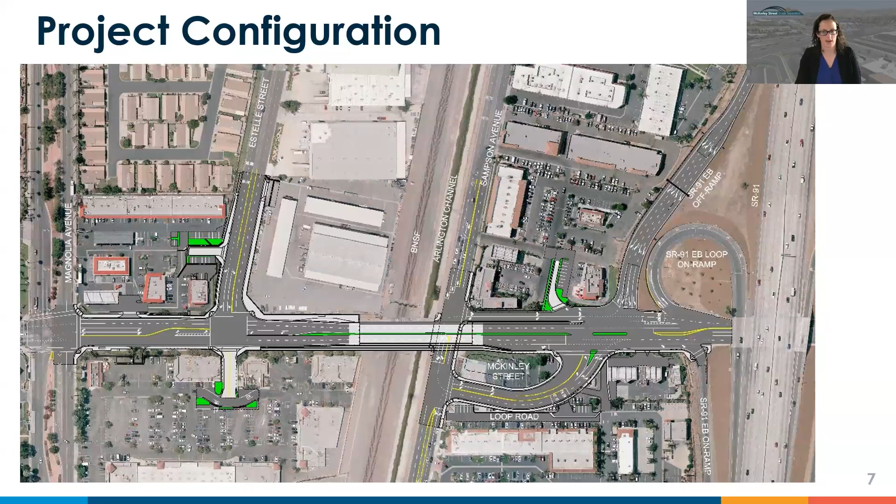All right, let's do a quick run through of the project improvements. Most of you have seen this slide before, so we'll keep it quick, but for those who haven't seen it, this is the project configuration in the after condition. McKinley Street will be a 4-lane facility, 2 lanes in each direction. Magnolia Avenue is on the left side of the slide and the 91 freeway is on the right side with Sampson down the middle. In this rendering, you can see the SR 91 to the upper right and Estelle Street to the lower left side. This is a view looking northwesterly toward the bridge.

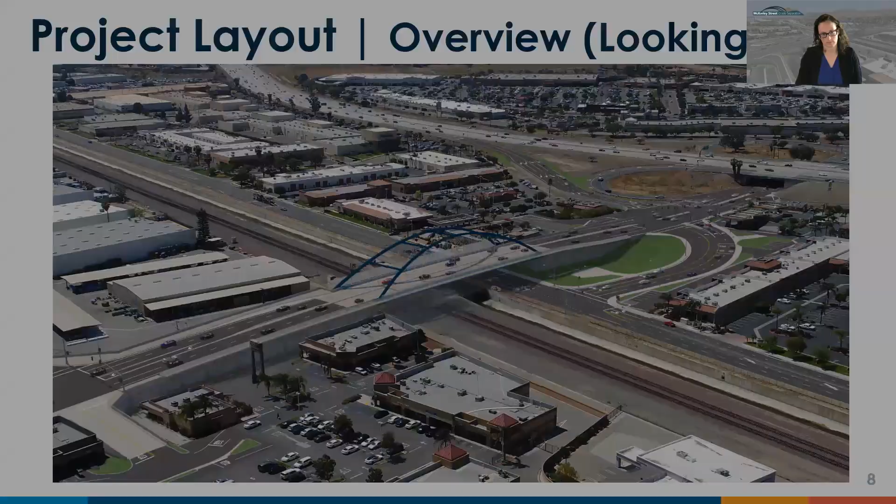In this rendering, you can see a good view of the steel network arch bridge looking westerly. It is a lightweight structure that can be built in a staging area and moved into place overnight, which we expect to occur early next year.

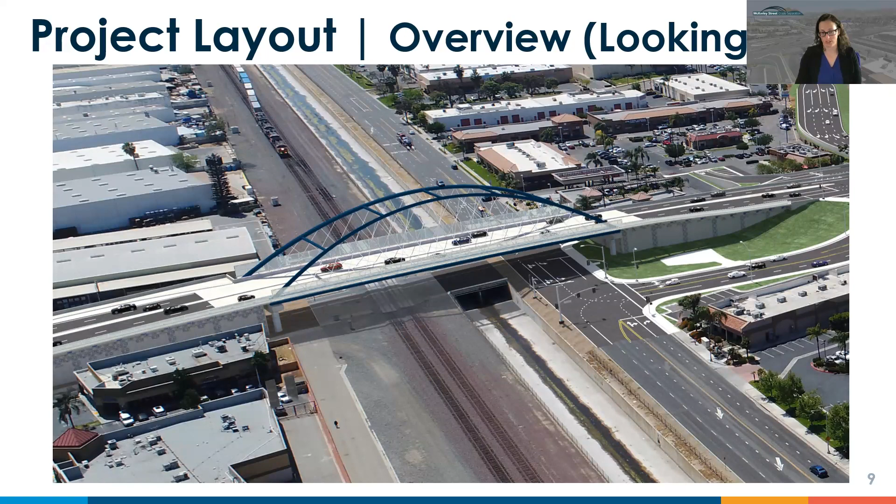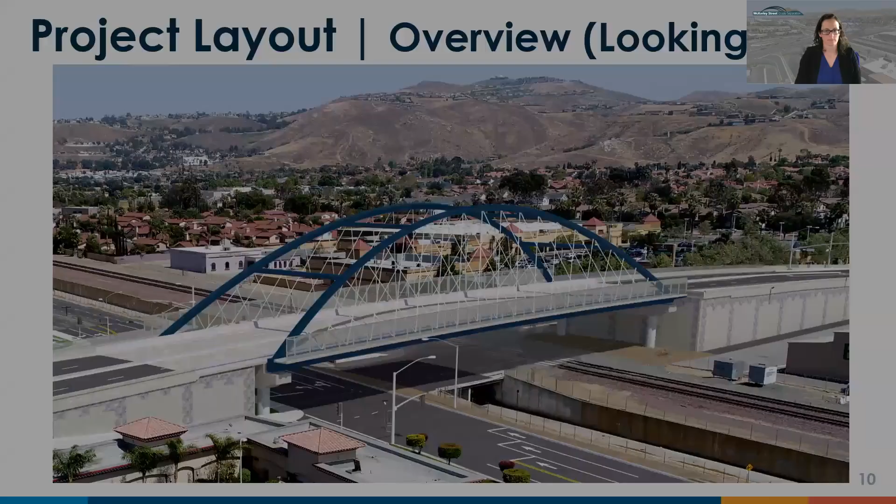This is a great view looking southwesterly where you can see some of the retaining walls, and as you can see, they will have the dot pattern as previously presented. Here's a good view looking northeasterly where you can see the McKinley Street southbound side ramp connecting to Sampson Avenue. This is a good view and close-up of the bridge looking southbound over the bridge.

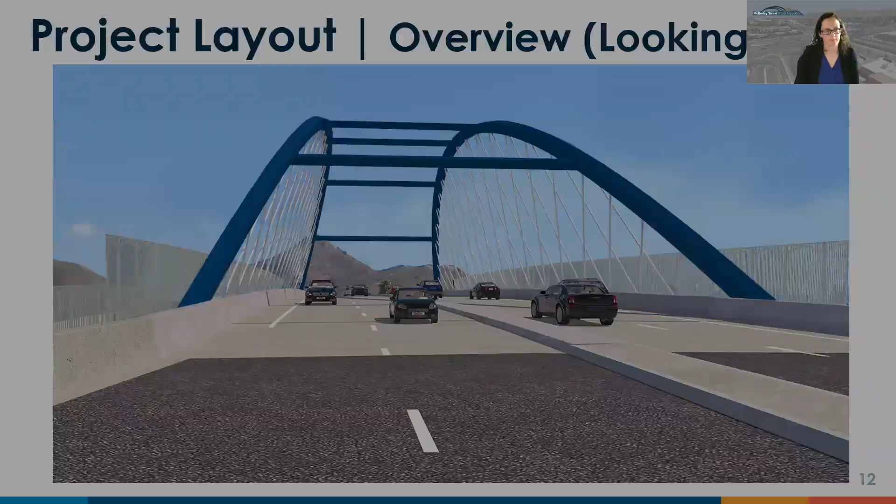Let's do a quick fly through from our drone footage shot earlier in May.

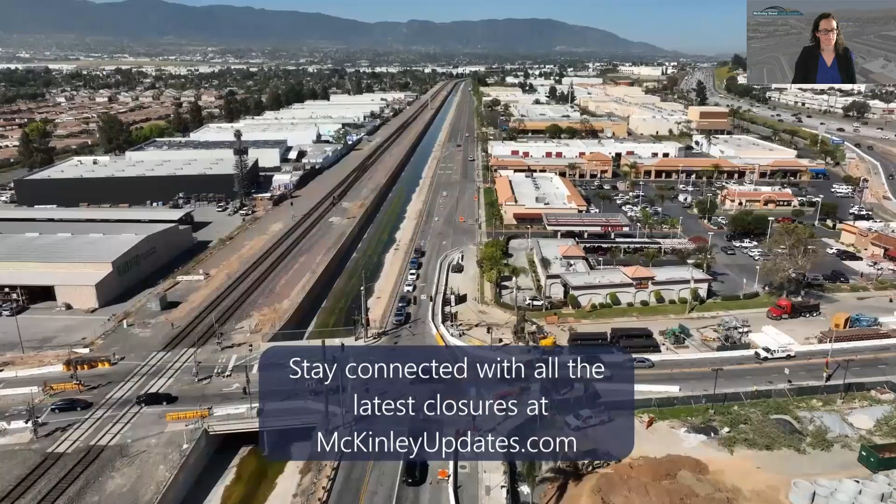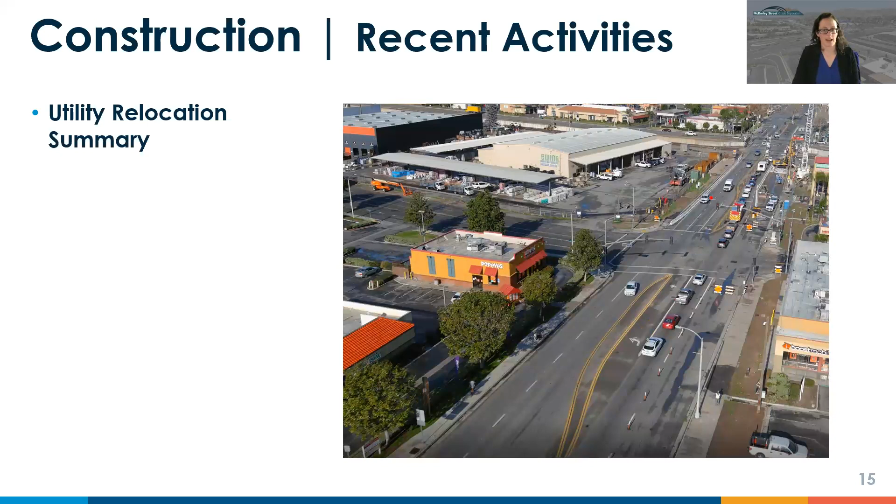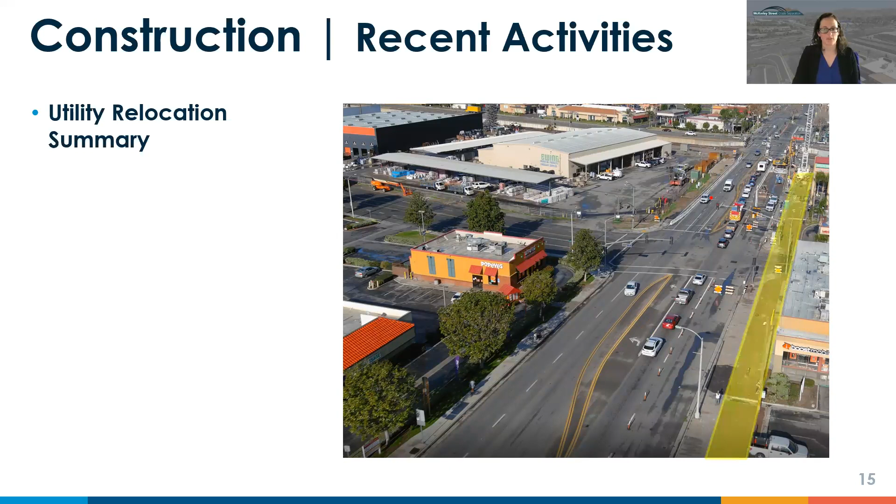One of the big achievements late last year was completing the third-party utility relocation efforts. Let's quickly go over what those look like. Here's an aerial looking northwest over the Estelle intersection from last summer. You can see the poles highlighted in yellow, and overhead electrical lines have been removed and undergrounded. We also have gas, electric, and public utilities that have completed their underground work, shown in yellow right here. And Riverside Public Utilities relocated the remaining water line improvements here noted in yellow.

So what do we have left? We have miscellaneous raise to grade adjustments to manholes and vault structures during construction. We also have sewer water line work associated with both the City of Corona and the Western municipal facilities. And lastly, we have some closeout for utility agreements. I'm going to turn this over to Josh Cosper with Mark Thomas to talk about some additional recent construction activities.

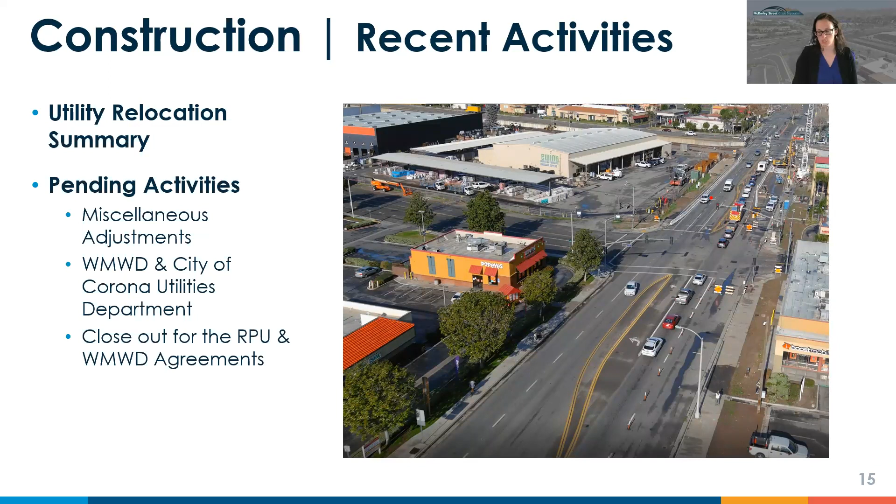Josh? Thanks, Juliana. So what have we built lately? Well, along the east side, we recently completed both piles late last year.

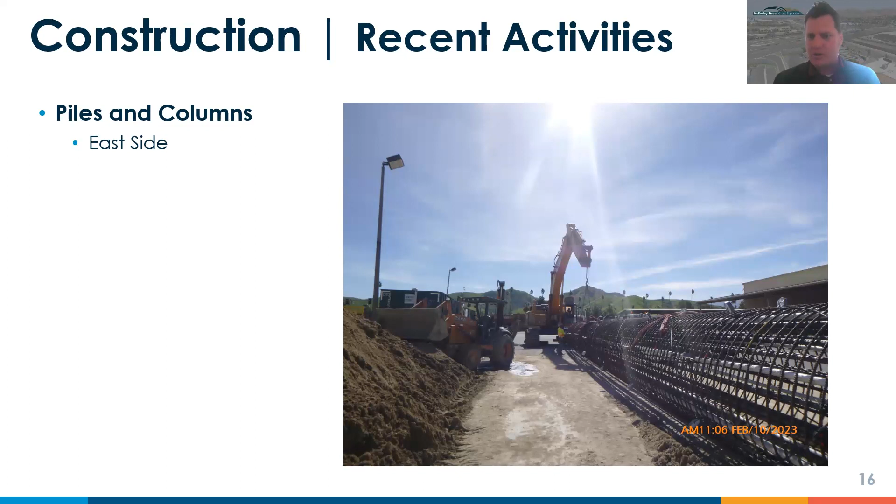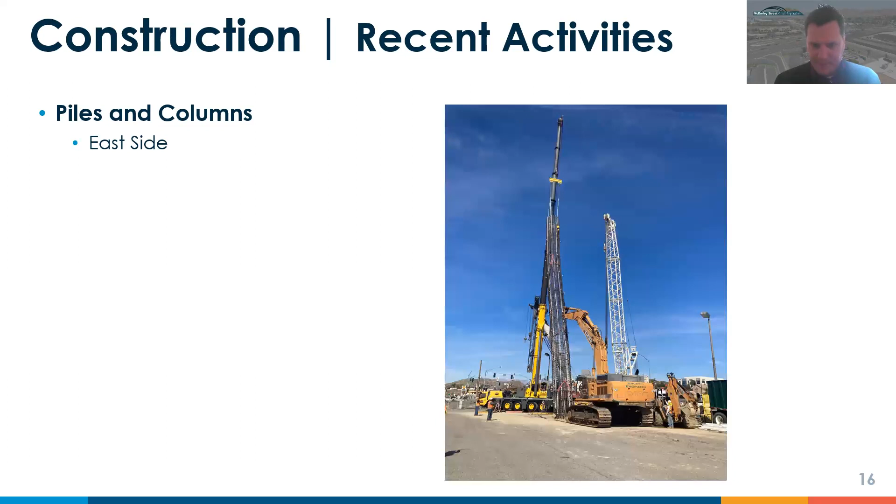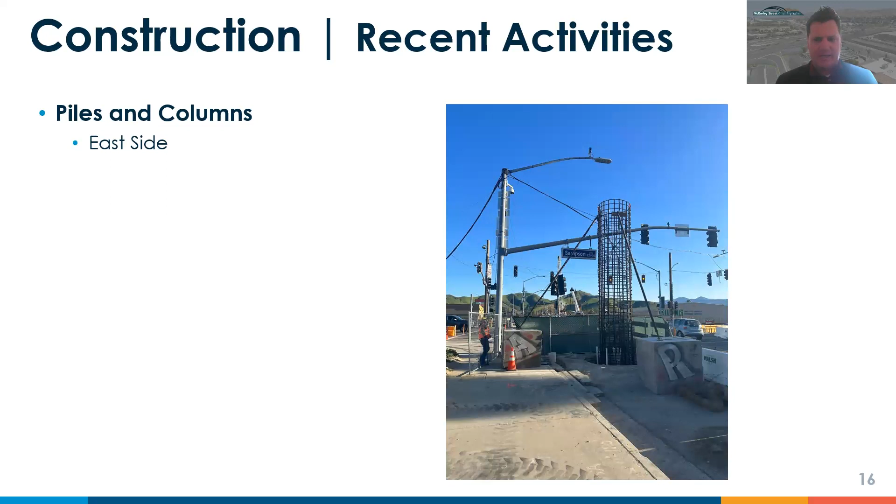The contractor recently completed some of the column erection for the rebar cage, which we'll go over as well. Here's a good picture of the rebar cage associated with each column, here's the crane actually lifting it up, another good picture, and here's one of it getting dropped into place. Lastly, here's what it looks like ready for the actual construction.

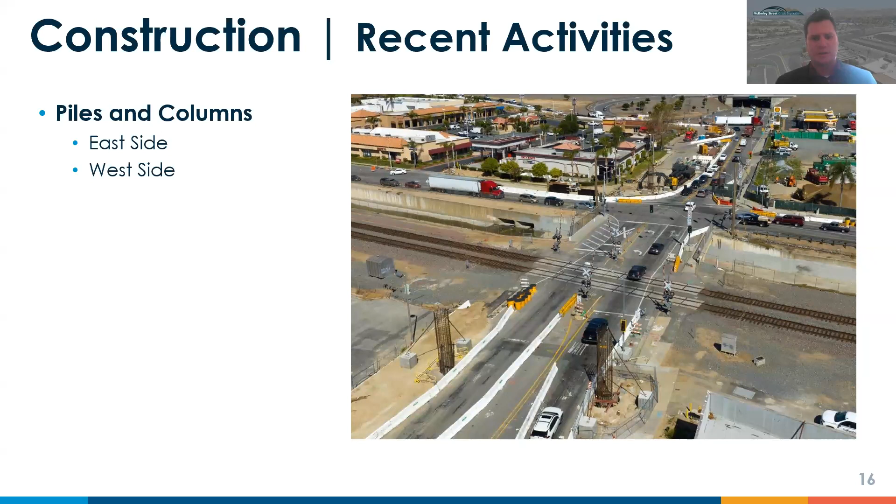On the west side, we recently completed both piles earlier this year as well. Here's a good view, as you just saw in the drone footage, with all the rebar cages above the ground. You can see them highlighted here in yellow.

Here's basically some ground views of the columns. The one in the upper left is north of Sampson, and the one in the lower right is south of the railroad tracks.

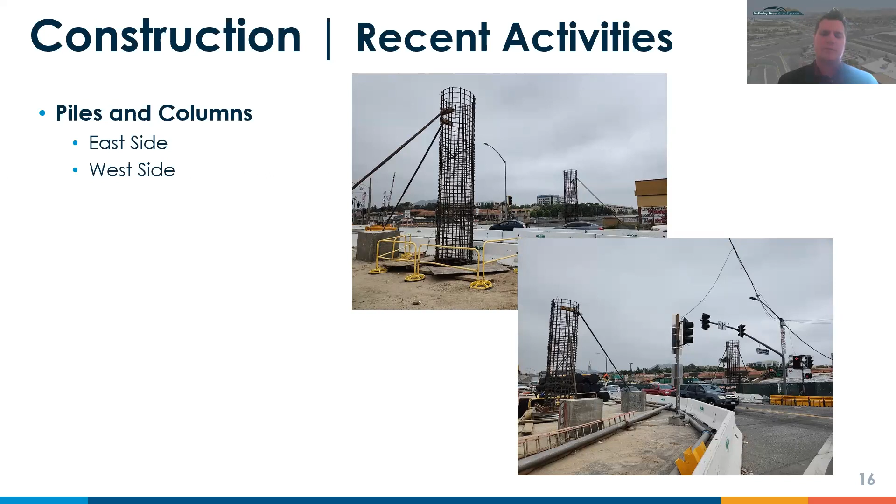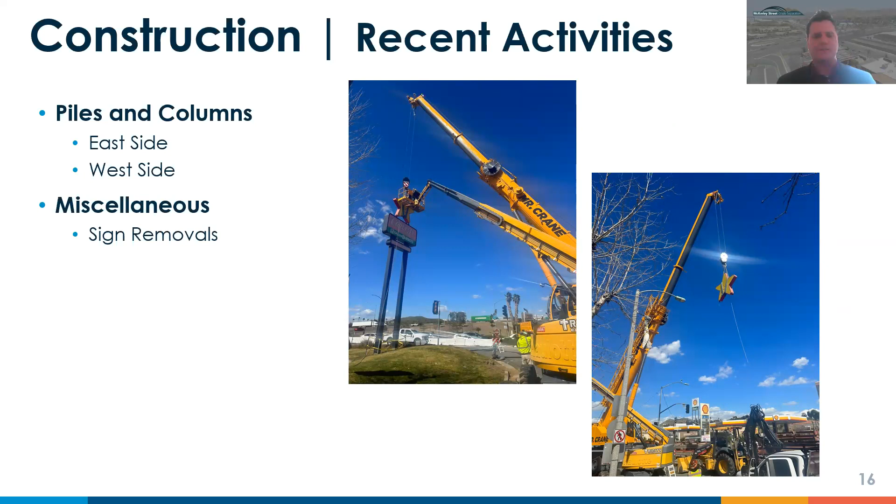We've also recently removed the sign at Carl's Jr. earlier this year. We're currently working with Shell and Arco to get their new signs installed as well. That's in the process.

So lastly, we're getting ready to install underground water system improvements and retaining wall improvements, but we'll discuss that in more detail later in the presentation.

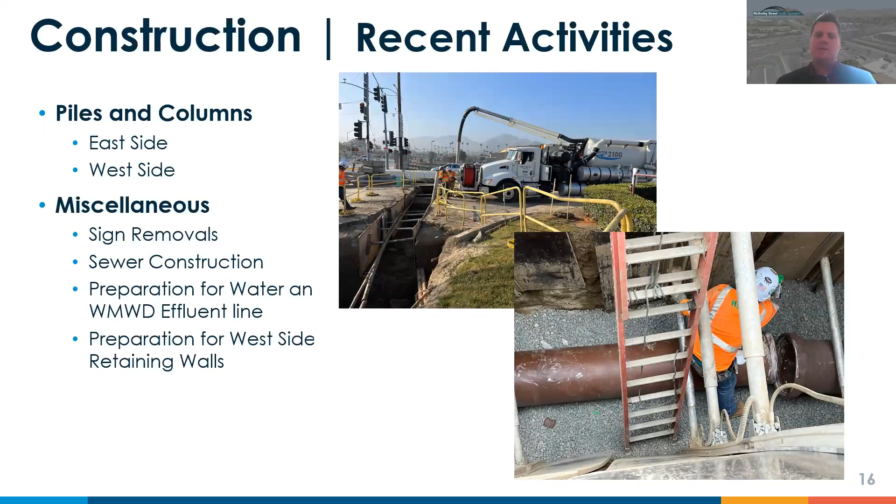What you don't get to see is the amount of work in the fabrication of the steel bridge. We've actually been pretty concerned about the fabrication process and the timelines, so we worked with the contractor to visit the site May 1st up at their Vancouver, Washington plant, where much of the bridge is currently being fabricated.

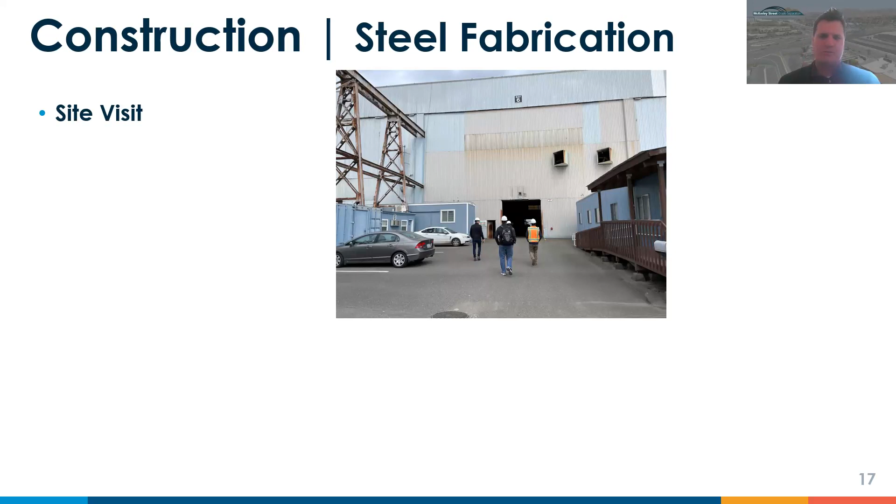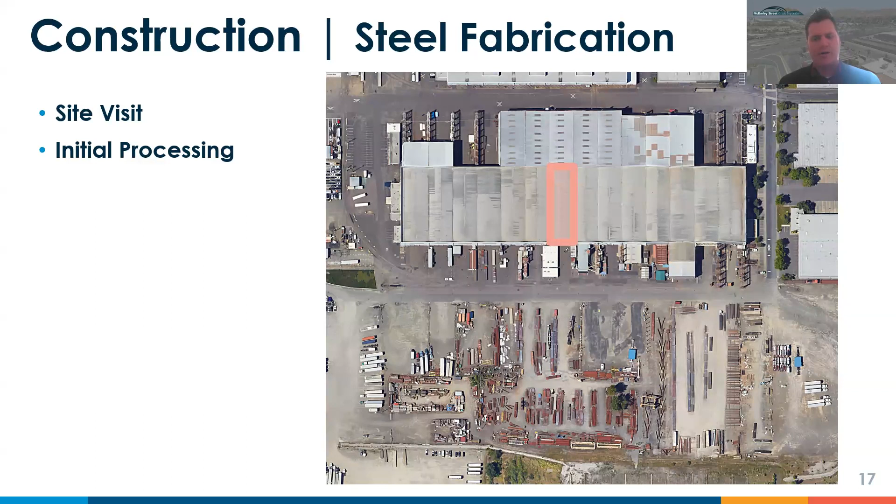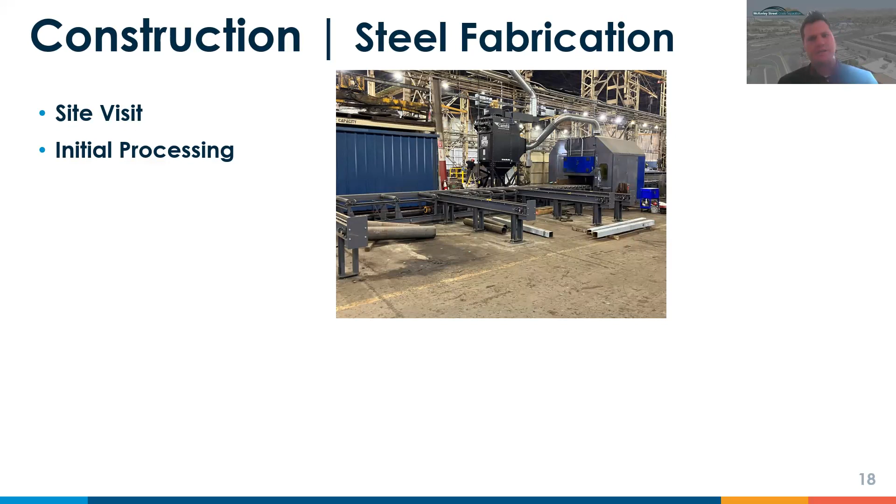In this process, large plate steel is rolled into progressive rollers to be cut to specific sizes or shapes, or have drilling or other components added to support connections and joints. This is a good picture of a progressive plate processing drill line, and you can see another one right here.

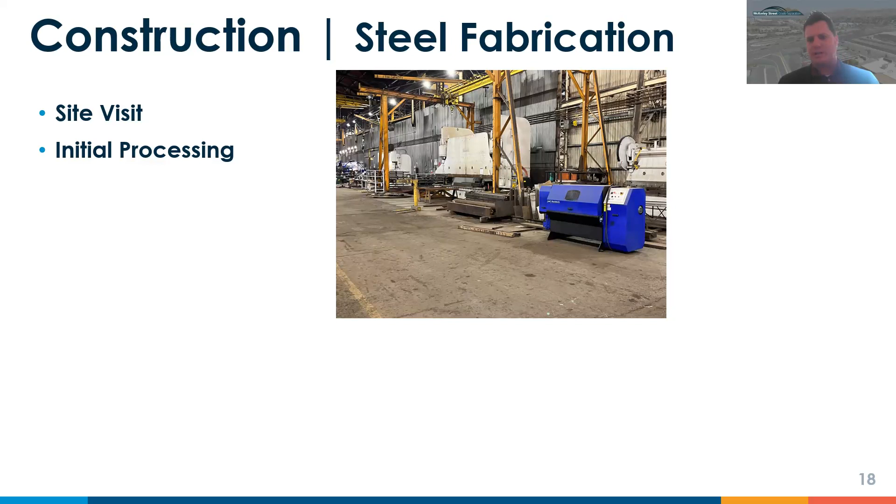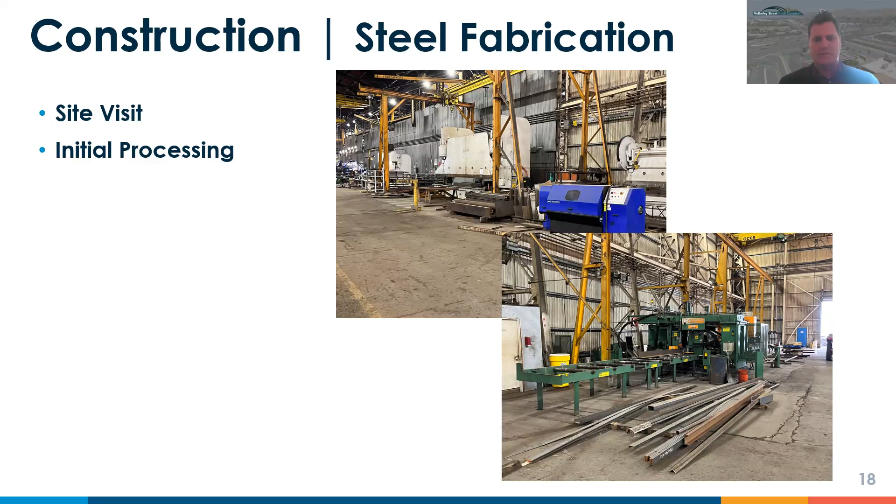This picture shows the plasma cutter, which helps get the angled cuts and some of the shapes needed. Lastly, here's a Peddinghaus machine that also cuts, drills, and welds components. Ultimately, as we get to this picture, you can see much of the miscellaneous parts like stiffeners and supports that'll be welded into the beams and structural members.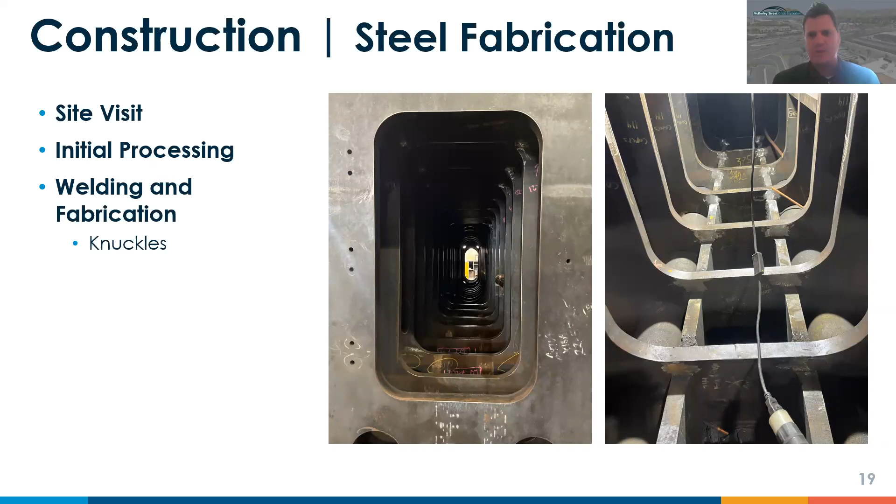Here's really a picture of what they look like on the inside. There's dozens of stiffeners, the rectangular plates that you see inside each one. They require extensive welding, cleaning, and smoothing after completion.

All right, so here's a good video of just some of what you see as the final cleaning and fine tuning after the welds are complete.

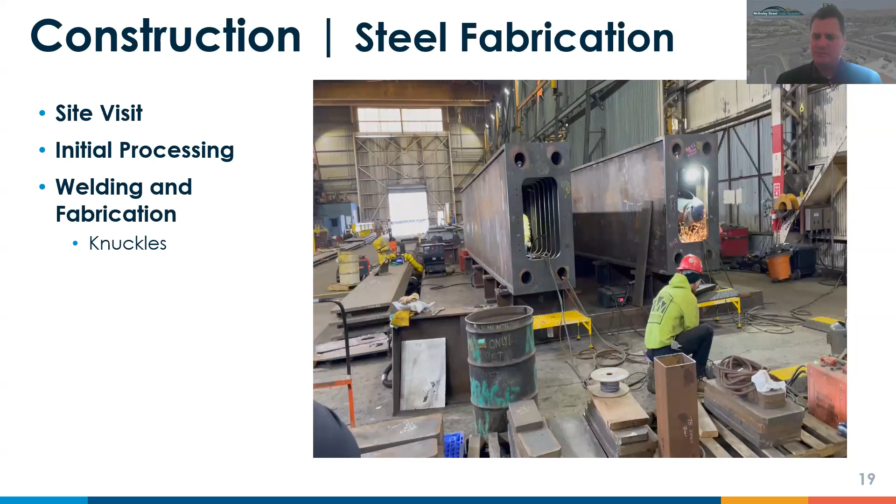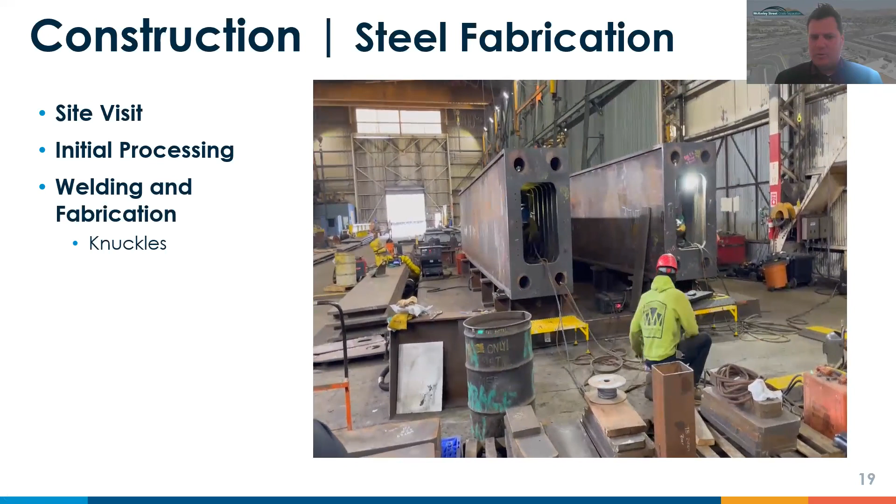One of the challenges we have is actually having to move them with the giant gantry cranes you see, the overhead yellow cranes. Often you'll have in these bays areas for initial welds, and you're going to move it over to the area where it's going to be cleaned and fine-tuned. Here's another quick video of just kind of seeing how that works.

So it's not a quick process to move everything around, like you're working in your normal garage.

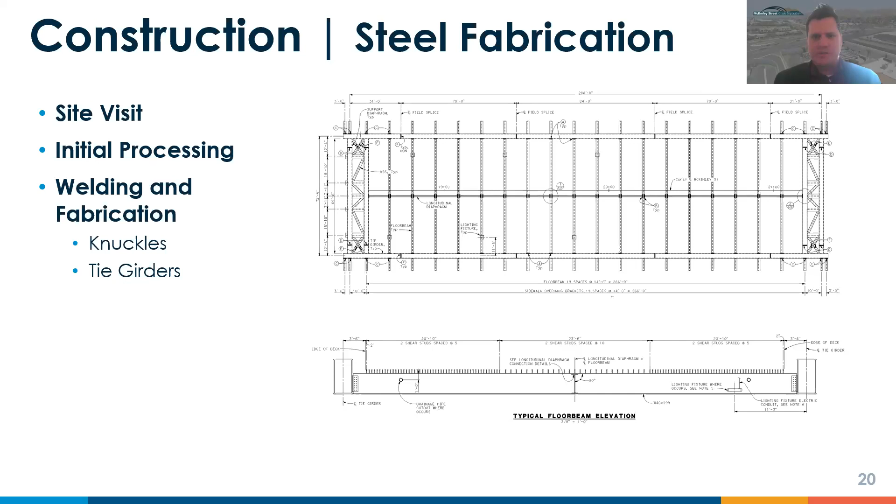Another really important component is the tie girders, as it's really the backbone to the decking or diaphragm support system. They run longitudinally along the bridge, as you can see in orange. This is the same bird's eye view from the previous knuckle discussion.

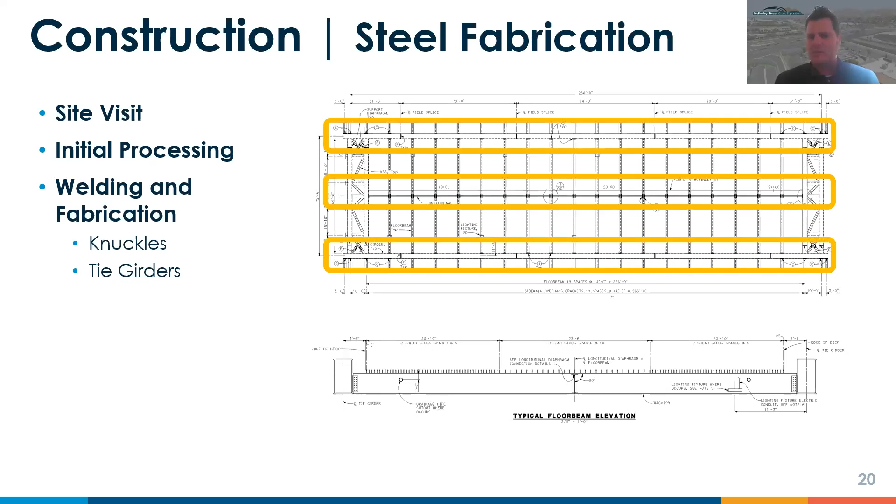Here's a good picture to show you one of the tie girders as a finished product. Because the bridge is about 300 feet long, these are created in segments long enough to be transported on a flatbed, so it involves a lot of miscellaneous fittings along each tie girder. Here's another one with some of the support diaphragm connections in place.

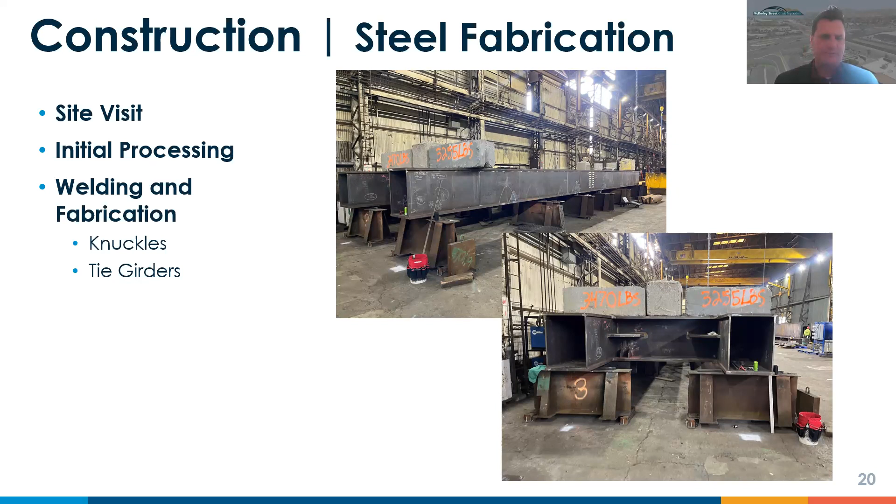And then, this should give you perspective of just how big they are compared to the average person.

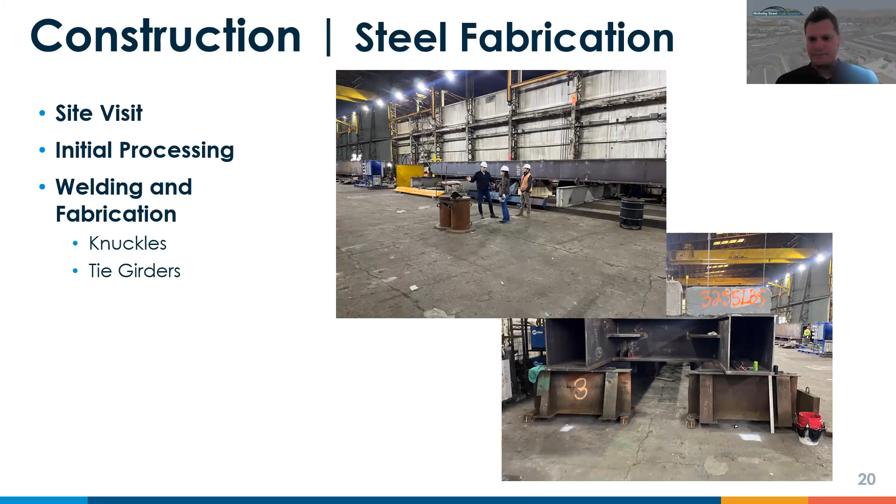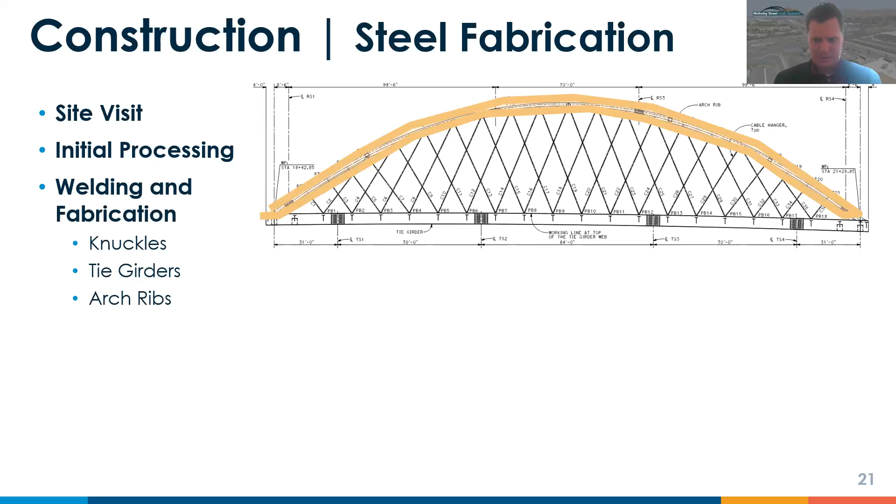Really the last important piece to discuss is the arch ribs. You can see them in orange on the elevation view of the bridge here. These are important as they're kind of the main source of vertical suspension with the cable hanger system to the bridge and the floor diaphragm.

Before we move on, talking to the fabricator, Thompson Metal Fabricator, they had indicated this is the biggest bridge arch they'd ever worked on, and they do quite a bit on the West Coast. It was maybe the second biggest bridge in the last 20 to 25 years. But this is a bridge fabricator that works on hundreds of bridge projects.

And so I gave you kind of the magnitude of the size of this bridge and the after condition. As these pieces get finished, they get ready for priming and painting.

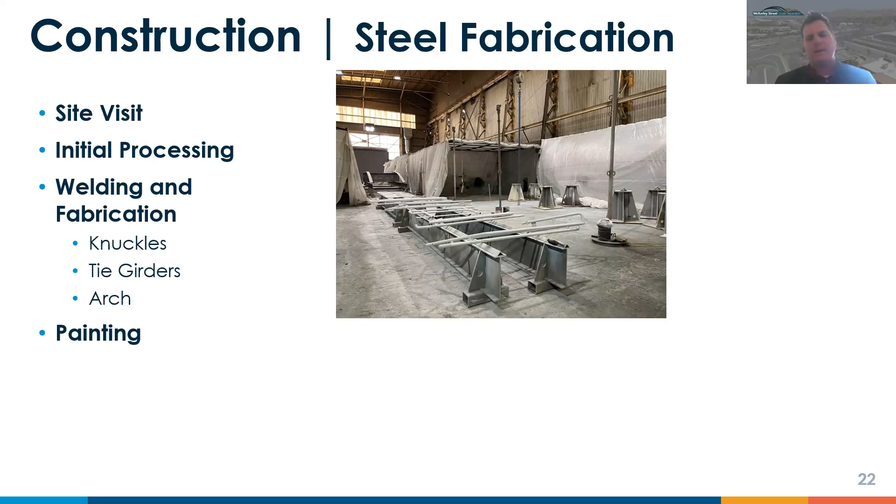And lastly, just more pictures. It becomes a pretty extensive painting process as it gets close to final progressive assembly.

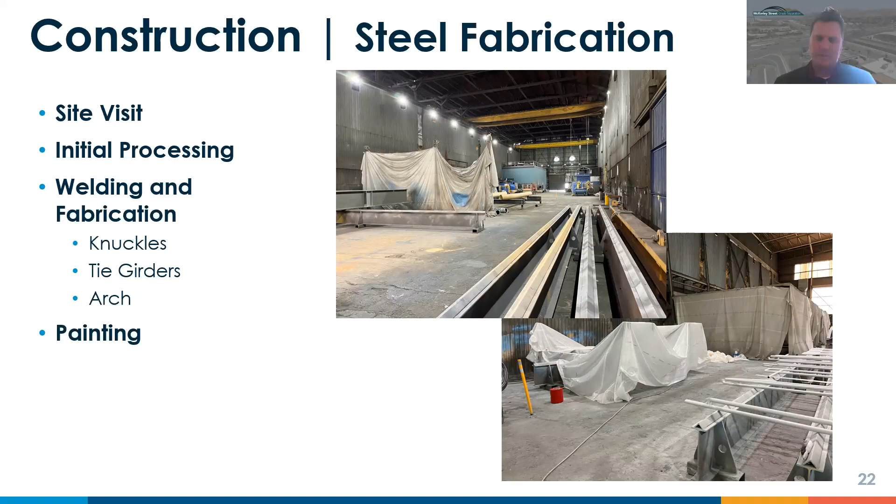This isn't endless room, even though these are pretty massive, so often what they have to do to make room for the assembly is move many of these pieces out for temporary storage.

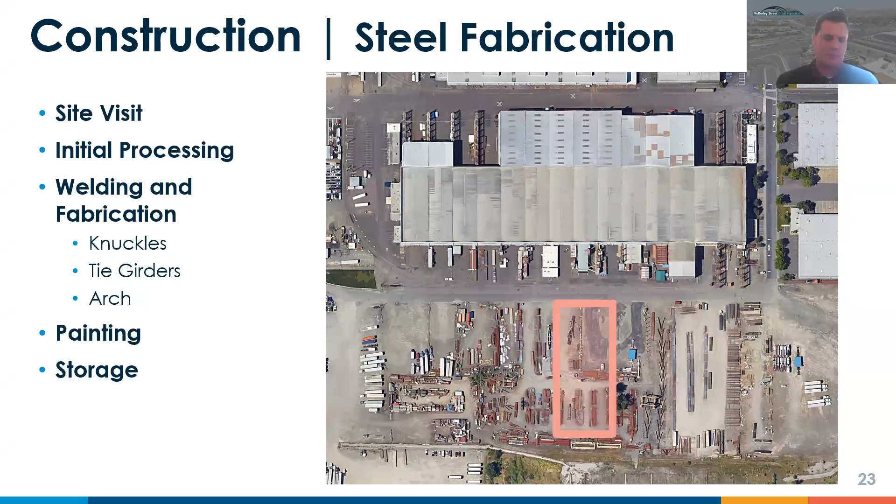Really, this is one of the last steps as they get ready to ship it down south. They'll get ready to do what's called a progressive assembly. This involves taking all of the pieces and getting them into basically one to two of the bays, and effectively assembling the entire bridge under controlled temperature and survey and oversight conditions.

It's like a last check to make sure that everything fits as intended and fits to the exact dimensions. This information is provided to the prime contractor, who will actually use it to assemble the bridge on site later in the year and get ready for that bridge move and erection.

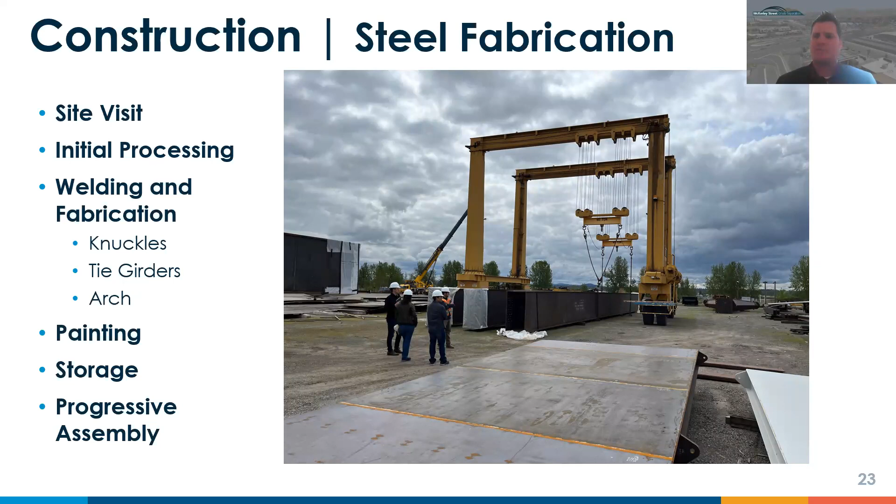Thanks, Josh. We know that it's hard looking at a little map in these presentations, so we wanted to spend a little more time during this meeting just talking about things we've done to help with detouring traffic around the project area.

First, we recommend checking the project's website, McKinleyupdates.com. There's a good story map there where we update traffic control changes and traffic patterns. We want to help you be aware of what these changes are. The project also sends out bi-weekly construction alerts and text message notifications to the public, designed to make you aware of project updates and traffic control changes.

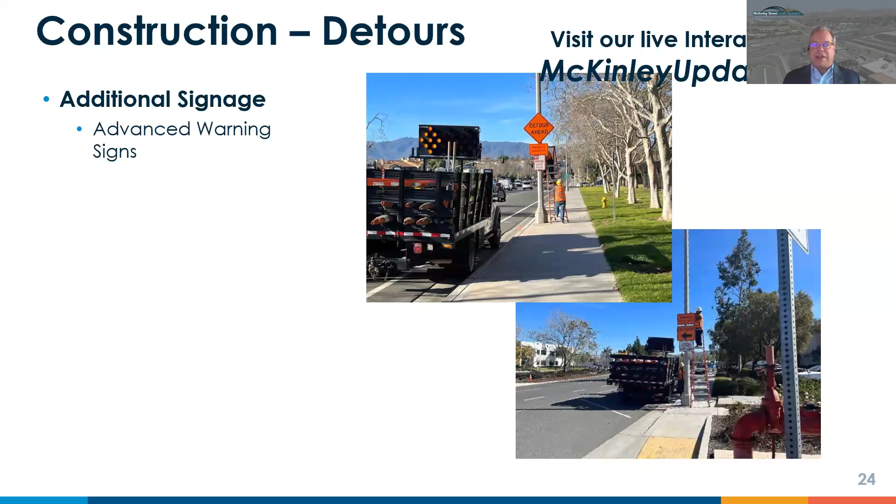So what else have we done on the traffic and detouring side? It starts with significantly more advanced warning signs. We added signs along Hidden Valley, Magnolia, Sampson, and Promenade to help encourage traffic to detour around the project areas. We also moved and changed the messaging on the changeable message signs further in advance to help better guide drivers.

These signs don't really show it, or look like they're working, but it's because cameras don't take good pictures of these signs. But believe me, they are working.

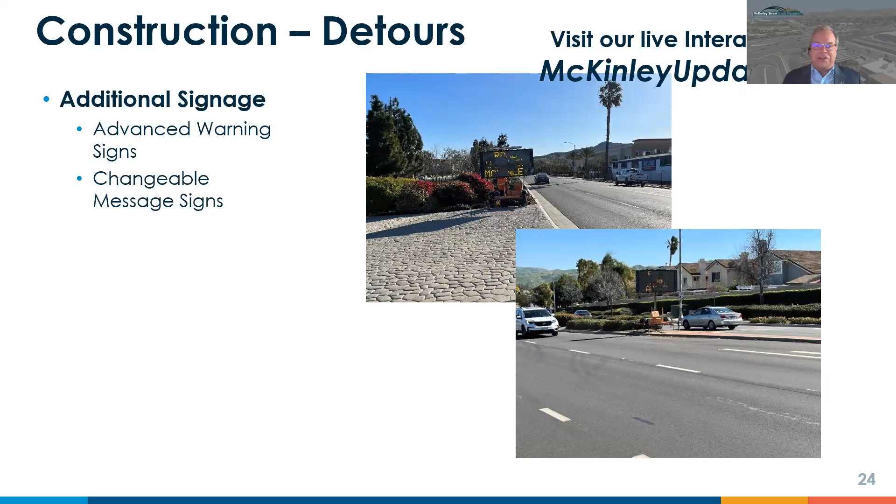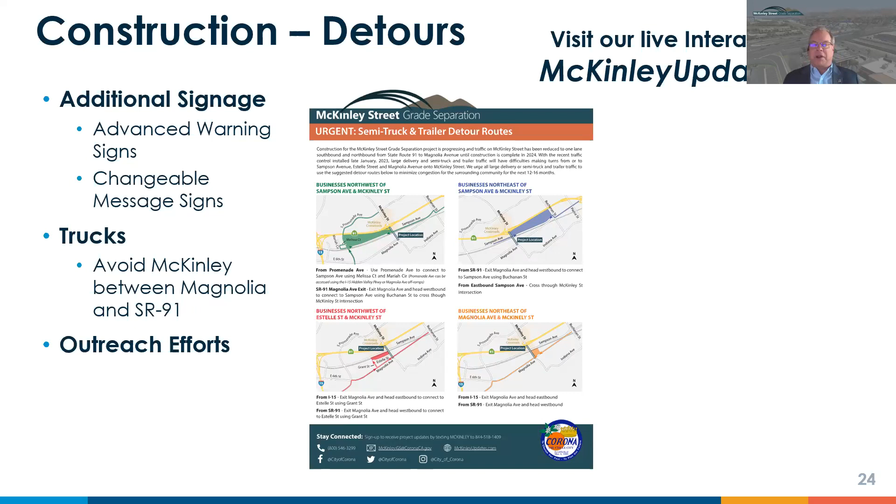We've also added signage that restricts trucks between Magnolia and SR-91, again to help reduce congestion. And we've hand-delivered customized truck detour notifications and maps to businesses within the project area. This is the type of information we also push through the project's website and through biweekly notifications.

Additionally, we've updated and prepared customized detour maps and instructions that were also posted to the project's website, and we send it out to the public through the project's social media. We're currently working on exhibits that'll help guide drivers to the businesses north of State Route 91. We're currently talking to the property management group and business owners on how best to distribute these throughout the shopping centers.

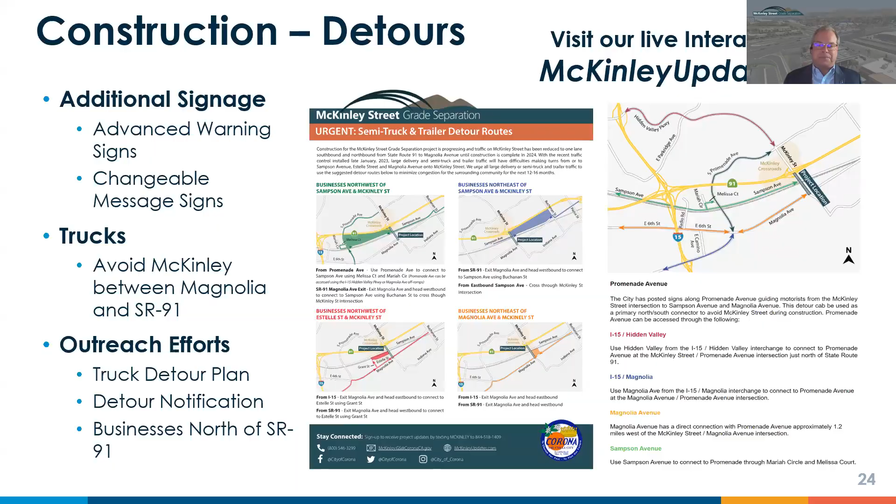So what are some of the upcoming construction activities? There's going to be significant water and storm drain construction. You can see in this picture in the upper right an actual 30-inch water line, and you can see the size of it compared to the people standing next to it working on it. In the lower right-hand corner is a good picture of how it's going to be constructed, involving a large trench box, because as you can see, these lines are fairly deep.

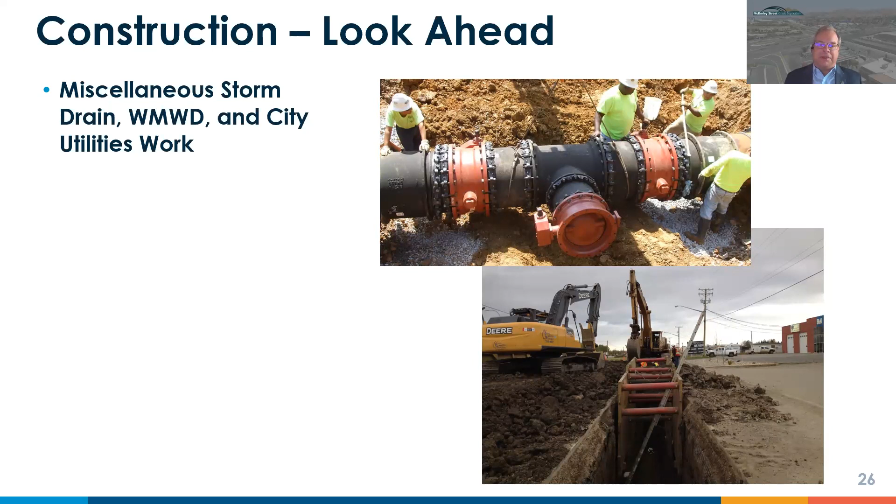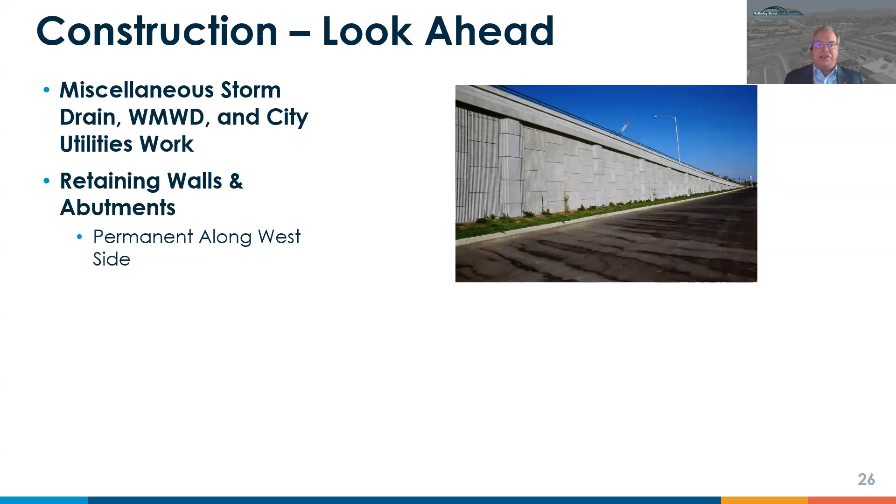You'll also start to see retaining walls go up. Here's a picture at the top of a similar view to what our retaining walls will look like when they're finished. The pictures at the bottom are of temporary retaining walls that will be built next to traffic. These particular walls in this picture are actually of the current Hamner Avenue Bridge just north of the Santa Ana River, similar to what ours is going to look like. Our project will build these walls, and they'll later be buried or removed when traffic gets shifted to the new roadway currently being built.

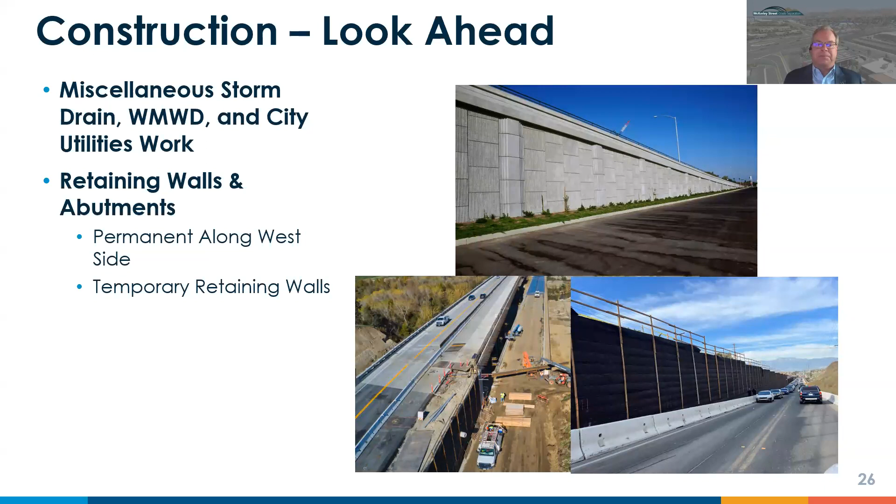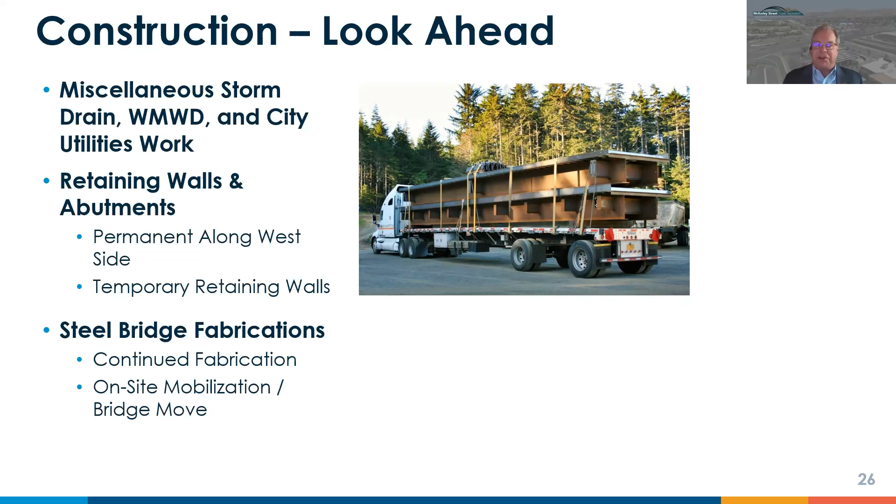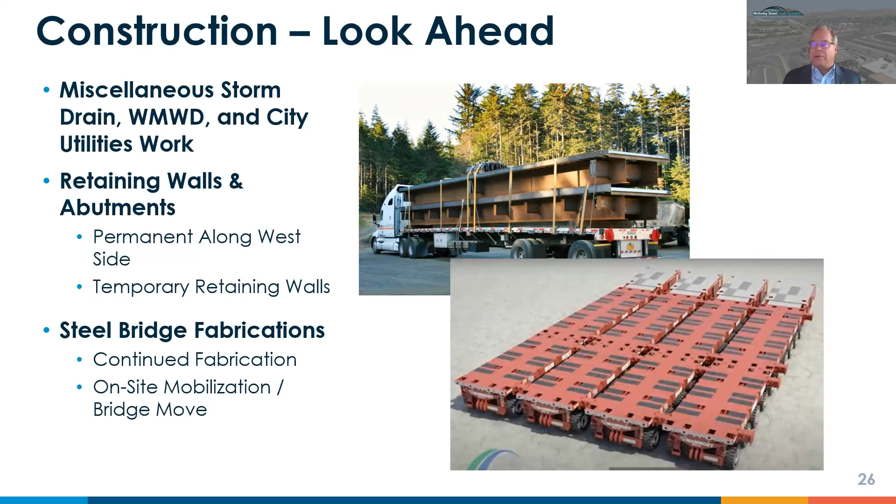Here's a picture of a smaller tied arch bridge being constructed in Detroit, in the process of being moved. As you can see in the picture, our bridge will be moved over a couple of weekends. The first weekend will be to cross Sampson and the Channel, and the next weekend will be to move it into place.

So these are some pictures that are similar to what you can expect to see out here in the next several months. And now I'm going to turn it over to Ashley Zaragoza to talk about the city's support through their economic development department. Ashley?

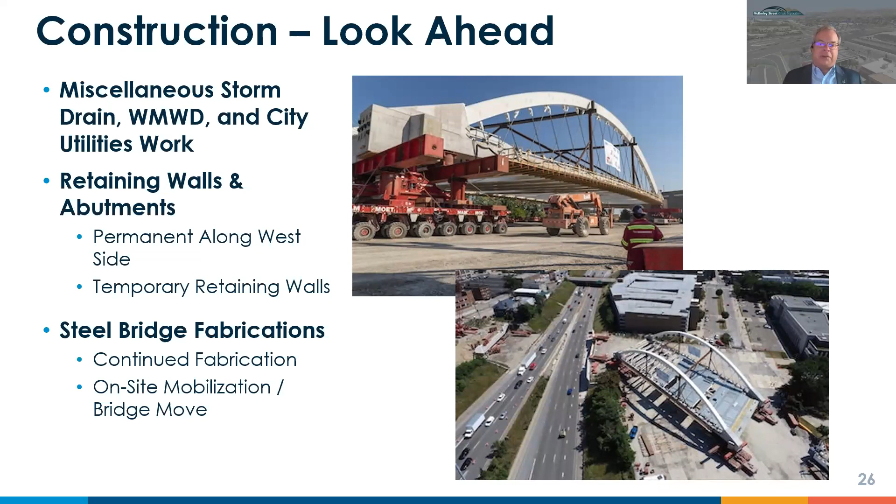We have a newsletter that goes out to over 14,000 subscribers, and it's a really great opportunity to showcase your business and highlight all the great opportunity there. What's great is that we share the detour websites previously shared during this presentation, so customers are now expecting this ahead of time and understanding the different ways to get to these specific businesses. We're really trying to find opportunity to connect them, whether it's continuing conversations or connecting them with grant opportunities.

So the first, as I mentioned, was the monthly newsletter. We do a shopping center spotlight, depending on where in McKinley you're off of. We also do social media posts, different ways to market your business, and this is all absolutely free—it's your taxpayer dollars at work, making sure we're including you on those newsletters or social media posts. We also do workforce support, subsidized training opportunities, or ways we can connect you with the workforce you may need.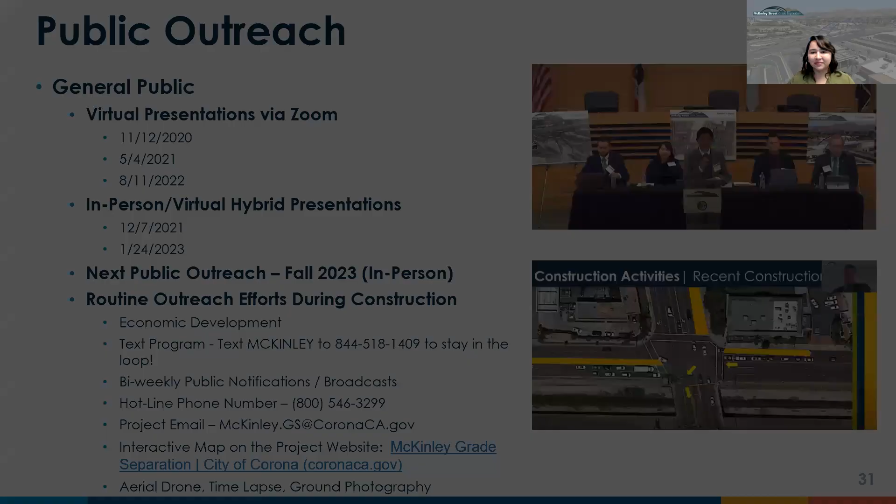Let's talk about our public outreach for the project. We've conducted numerous in-person and virtual public outreach meetings, including the most recent one on January 24th earlier this year. The next meeting will be sometime in the fall of this year and will be in person.

We'll also continue implementing the text program—we have over 440 people subscribed. If you want to join, just text McKinley to 844-518-1409 to stay in the loop on the project. We'll continue sending out bi-weekly construction alerts and outreach notices through the city's social media and project email, updating on look-aheads and achievements thus far. We'll continue active monitoring of the project hotline and email, and updates to the interactive web-based map showing anticipated traffic detours and lane closures, so you can stay in the loop.

The map is posted on the city's website and can also be found on the mckinleyupdates.com website. Lastly, we will continue with our routine aerial drone, time-lapse, and other photography throughout the construction of the project to share with the public.

And I'll now turn it over to Matt to begin our Q&A session.